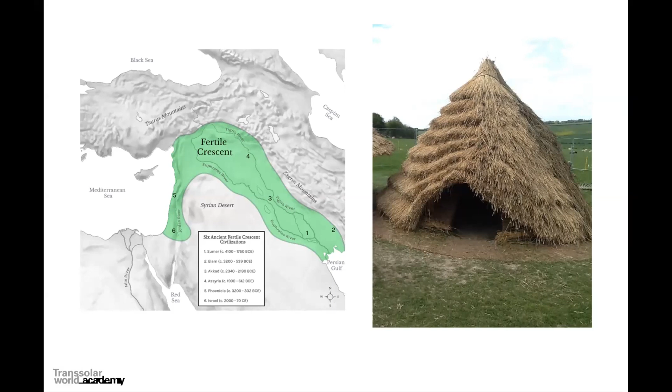Or if you live in a place where even the wind is hot and you also need protection, you can have a tent and add some extensions to create wind protection. And you also had this strategy of vertical migration.

So you have a building where you have different comfort situations depending on where you are. If you're closer to the ground and lower, if the temperatures drop, you can go to the upper part where there's more sun. So we see this feature of adaptation everywhere where humans are, and of course we see them today in cities.

Then what were actual revolutions were 3 industrial revolutions that we have seen. An industrial revolution is characterized by ways of transportation, communication, and energy that it's used. I'm gonna repeat it again: transportation, communication, and energy.

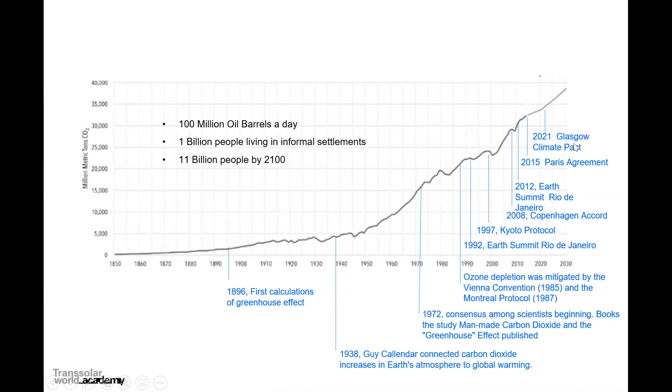And we also see interesting that people were warning since, let's say, the late 19th century that this is happening. We also see different agreements between countries taking place since the 70s and even last year. But in the end, the emissions keep increasing.

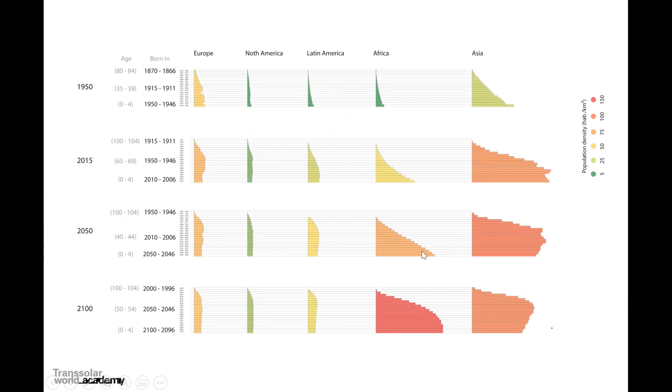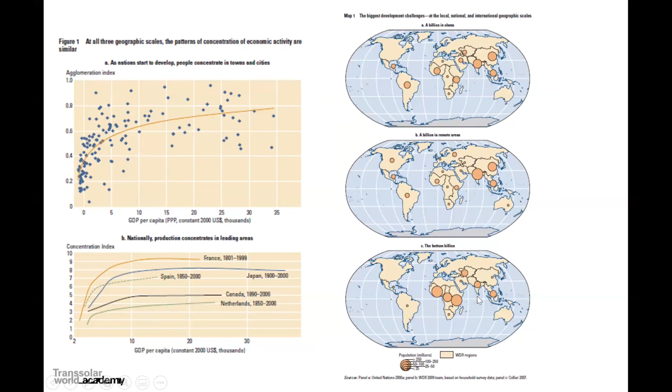Okay, so next we are going to look at the chapter of what is sustainable cities and what does it mean to have livable cities when we have such mega cities coming up. I think we've all seen those pictures where it's like a concrete jungle. Do we really want to move towards a future like this?

So we look at the multi-facets of urban planning, because it's quite a complicated topic, right? Because a city involves everything. So if we look at the sustainability aspects of urban planning...

When cities are born or when they grow, we affect environment and biodiversity. Forests can be depleted. We need resources. If we don't do this sustainably, then we cause deforestation. We can cause loss of animal habitat. We can destroy the water quality of our rivers. We've seen this happening around us everywhere.

What else can cities affect? We obviously affect the resources. Resource consumption and CO2 emissions is highly affected by how our cities are planned, and we can control how much energy consumption we have, and in turn the fossil fuel dependency, and water demand as well. In different cities, the source of water is different - some places are in the desert, some places are on islands, so some places have really trouble getting water.

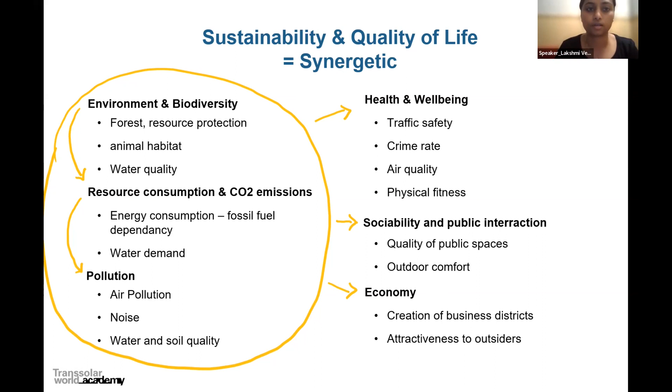We have less air pollution. This affects, obviously, if we have better air quality, that means our health is better, well-being is better. When we have less noise, when we have nice outdoor spaces, sociability increases, hence also economy grows. So it's all interconnected. And this is what we need to fight for and show that growing economy is not in isolation of sustainability - they all go hand in hand.

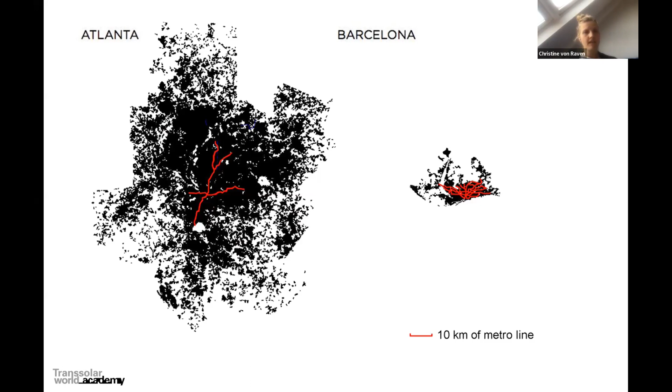This study led to some strategies or basic fabric structures of how you can define a city. Switching to the next slide, here are the common urban spatial structures based on the density where people are living. The more red the parts are, the more dense - this is a theoretical city, not a real one. In the top left, where Lakshmi is pointing, you see a really classic, typical city with a big center, like we saw in Barcelona, going lower and lower with density. Below that you see a small urban area, like a typical smaller urban area looks like.

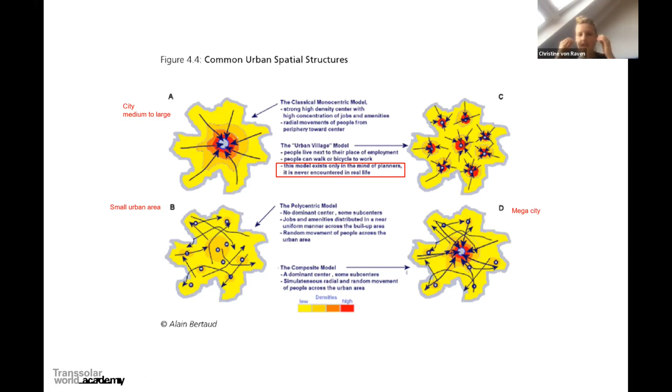So when we think about urban sustainability and livable places, we have to think about resilient urban infrastructures. We have dense cities, and they have to have a good infrastructure network to work on all different levels, in all the different aspects Lakshmi mentioned before.

So there are really a lot of dimensions of infrastructure. You can think about supply and disposal, where goods are coming from, where the waste is going, we have the mobility infrastructure, of course a really big issue. We have also digital infrastructure - how do we have the connection to Zoom right now that you can listen to us? And then we have the energy infrastructure, a really crucial point, social infrastructure, and blue and green infrastructure.

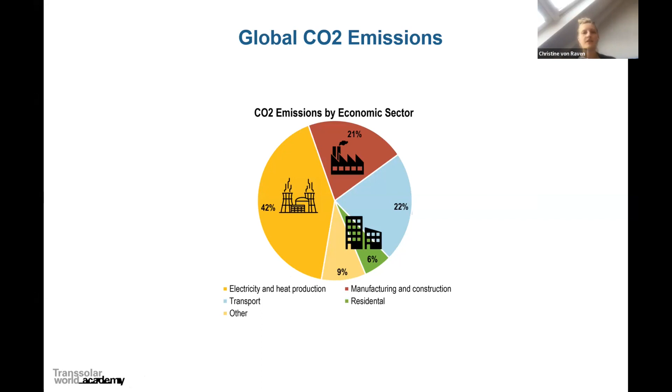You heard already a lot from our colleagues about energy and buildings, so we don't have to talk about that too much. But here again, the global emissions share, you can see by economic sector - you can see the big yellow part, which is electricity and heat production. Just energy production makes already most of the CO2 emissions. And also in the other parts, at the end of the day, most of it is energy supply. So energy is everything. Can you go next?

So to become carbon neutral, there's no other way than to make the energy shift from fossil fuels to climate-friendly energy sources. And you heard already what this can all be, from wind energy, solar power, electric vehicles - all these different energy sources we have to switch to, we have to think about them when we develop cities.

We saw it on a building scale, but really important to say is that energy is always a network. Of course it can work within one building if you have a PV panel and it works for itself. But at the end of the day, it's more efficient and makes more sense to think of it as a big network. You have PV panels outside the city, you have maybe wind power plants outside the city, you can have solar panels on one roof and maybe feed the electricity to the neighbor. Here you can see it's just more like an idea of how you can interconnect all this energy.

Cooling and warming is also most efficient when you think it together. Waste disposal and making energy out of the waste, you can also only do a bit more centralized, which doesn't have to be really big centers, but within a district you can create really, really efficient and working energy infrastructures. So you always have to consider your building within the context of the other buildings.

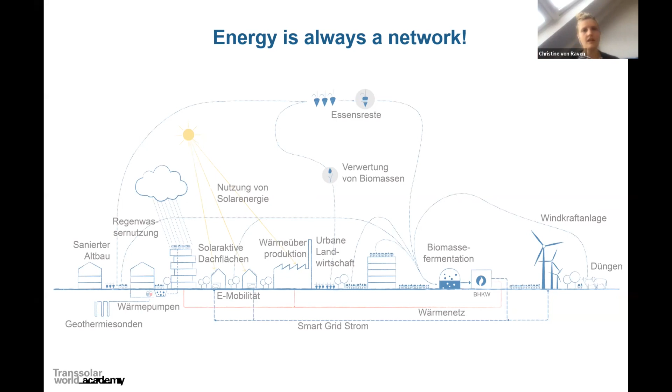Another feature is that renewable energy is usually local energy. You have a PV panel on your building and you have energy for yourself. You can maybe use energy out of the river for cooling and so on. So while fossil fuels usually come from really big power plants, which are centralized and organized by our government or so, renewable energy is usually local, run by locals. And by that, it's also an independent energy. You're not relying on the big energy grid.

Then the next point about big energy concepts is that they are always really individual. Here you see, from the International Energy Agency, the flow diagram of where energy comes from and where it goes. You can see it's really distributed - we have oil, we have coal, we have some renewables - and it's a global average.

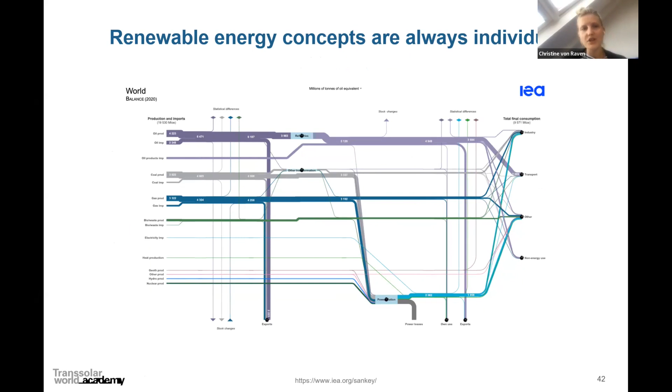So let's go to the next one, blue-green infrastructure. What is it and why do we need it?

In all cities globally, or most cities globally - in Germany we have it more and more, but of course in African cities it's already much more present - we have hotter years, it's getting really warm. In city centers, which are basically a lot of concrete, buildings, and public spaces made of streets, there are few green areas and a lot of building structures. So what we see is the urban heat island effect in city centers - it's getting really hot just because of the environment in the city. When you go out of the city, it's usually more land, agriculture, you have fewer high-rises, which stop winds that cool down the city. So in cities you have always really hot outdoor situations, and with that, uncomfortable times most of the year, inside and outside, or you have to cool by electricity, which increases electricity demand.

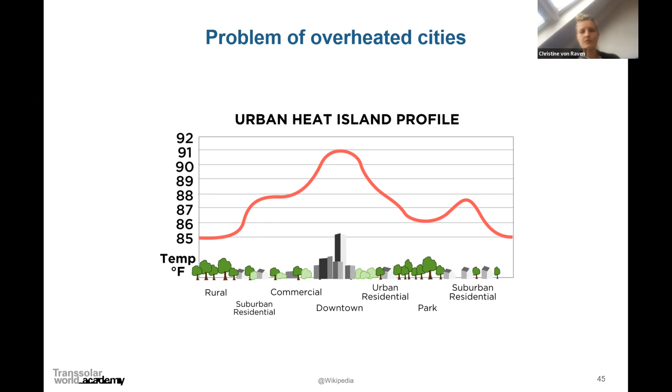The other problem in many cities in the world is flooding. Cities are usually really vulnerable - if it's really dry for a long time and then suddenly it's raining a lot, you have all this concrete in the streets and cities, the water cannot drain, so you have flooding in the cities. This is happening more and more, causing a lot of damage, which will increase in the next decades. So how do we deal with that?

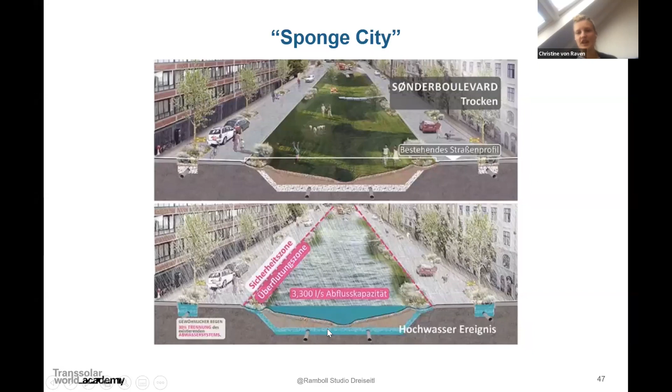The concept is called Sponge City. It's a really popular idea - that the city works as a sponge. Here you can see an example. Instead of just streets and concrete, you open up the city, you have green spaces like here, which in daytime or nice weather are also nice outdoor areas. But when the rain comes, the area can be flooded and store the water without flooding the entire city, just this area planned for it. At the same time, you can save the rainwater and use it to water the plants during dry seasons. This concept is being applied in more and more cities, and every tree can actually help improve the water and heat situation in the city.

If I can add something, it's also very common now to have a green roof and then a PV panel on top with a little bit of a gap, so you can really combine both of it. Exactly, which you cannot see here, but it's as Lakshmi is saying.

Another thing is that blue-green infrastructure really creates livable public spaces. This is a project by Transsolar in Paris, where you can see how the water creates a good microclimate, and the trees make shadows to make it really comfortable there.

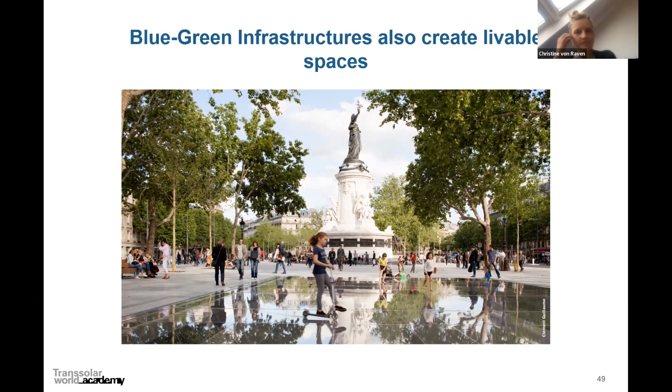This leads us to the third point: social infrastructure. It's something really qualitative, but really essential. When we talk about social infrastructure, we talk about hospitals, schools, community places, public space, and all the green around it. This is really essential when we think about a city for people.

Social infrastructure is really crucial and important, and it's not only about big infrastructure planning. It's always a question of how and where you can build it, because usually there's not a lot of money for it.

People came and brought trees into the space. We didn't do a lot of it—most of it came from everyone. So you can just rethink a parking lot as infrastructure without any building, just with people.

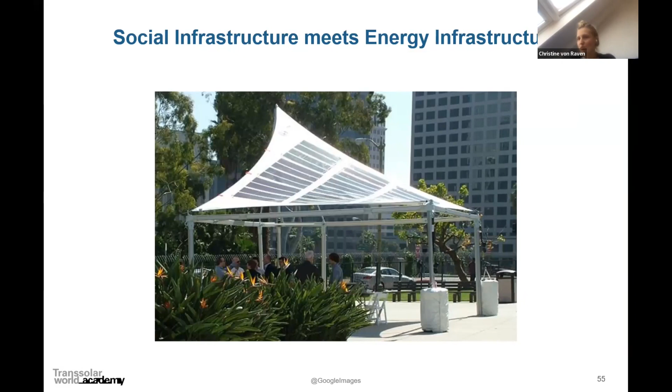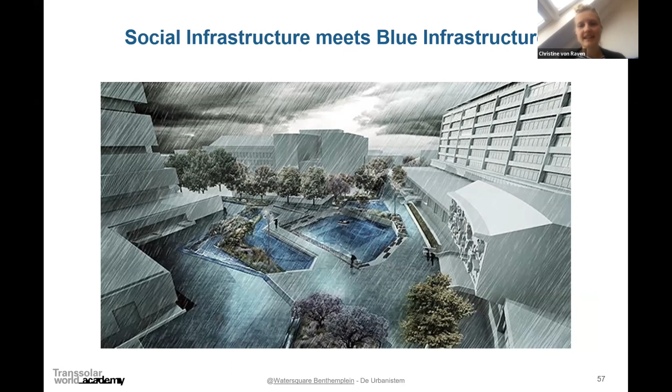But at the same time, it can be used if there's a hard rain—on the next slide you can see it fills up and works as flooding storage infrastructure. In the end, the water that's stored is used to water the plants and the city's green spaces, instead of just flooding the area.

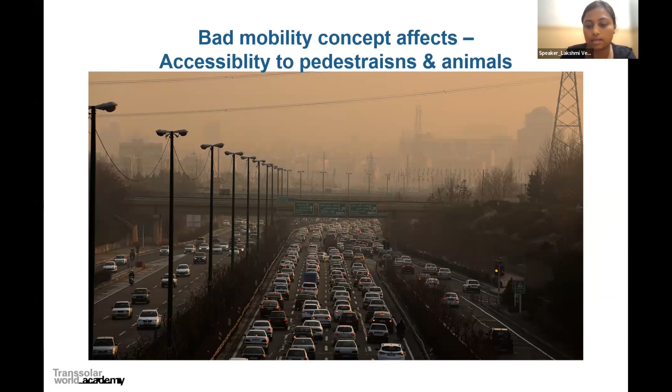And what about the other people who can't afford it, or who just need to go from here to there? It's really hard, and it's not equitable.

What else does a bad mobility concept lead to? It leads to loss of habitable spaces. Road widening means cutting down trees and breaking down buildings. It has led to destruction of really old heritage buildings even. And once it's gone, it's gone. You change the way the city looks, and it's not recognizable anymore. It just looks like a bunch of roads.

There's less space for people to live. If we are making roads all the time, then where are all these billions of people going to live?

Public spaces are then sacrificed as parking lots. This huge ground surface is all closed off. They put concrete on it, and it's just acres of parking lots. It doesn't allow water to go in, doesn't allow any plants to grow, and doesn't even allow people to use that space. It's even a safety issue, because you don't feel safe in a parking lot either.

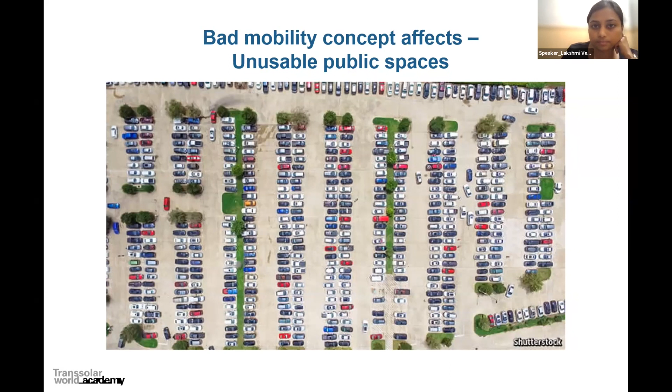It increases commerce. People want to hang out there, and if they hang out there, they buy more things. If you're in a car, you can't get off, can't stop there, can't cross from one side to another. You don't feel safe to just walk around and stay there, because it's noisy and polluted. It doesn't feel welcoming. We saw the example of Atlanta.

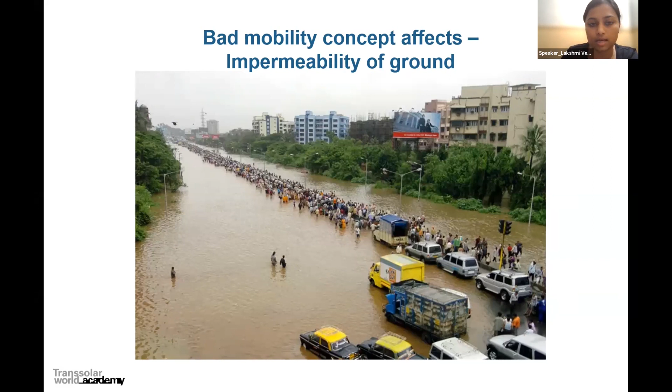And what you see here is... oops, I can't see. Diego, do you want to take over? Yes, sure, I'm here.

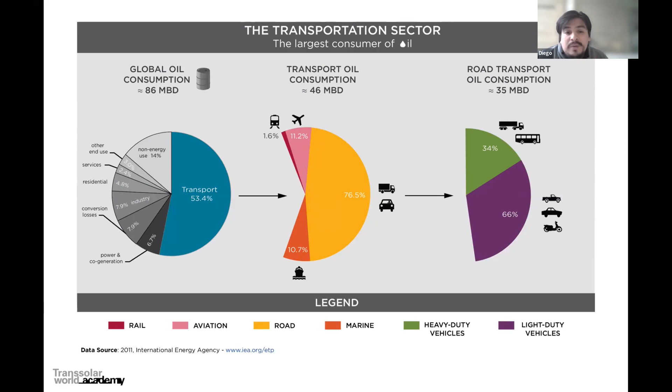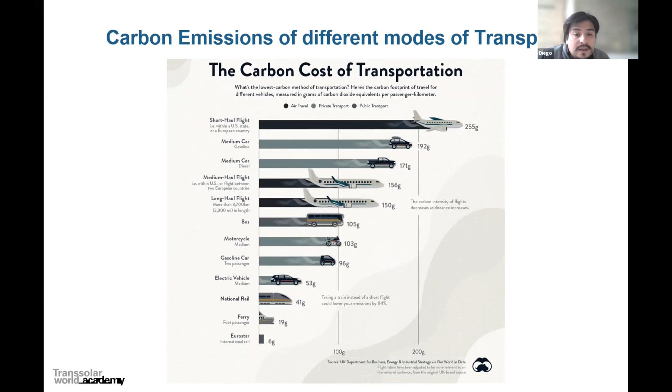Now there is a fair comparison, like in some places where the infrastructure is available: okay, should I fly or should I take the train? And here you see the answer. It's like less than 20% of what you have between a train and an airplane.

Okay, so now we would like to know a bit about you. And speaking of ways of transportation, we would like to know when you go to university, we have 4 options: do you walk, do you cycle, do you use public transportation, or do you use like a motorbike or a car? Who would like to participate? You can maybe just unmute, or write in the chat, and then we're gonna see what's the most frequent way of transportation.

Okay, we have the first one, public transportation. Oh, there's a lot of public transport. There's a pattern.

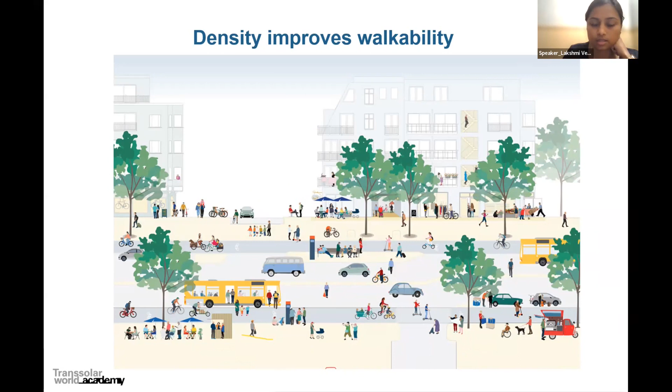So what are the factors that improve walkability? And this, when I say walkability, it also applies to using your bicycle or just accessibility to things. When we have more dense spaces, that dense, like as in more floors, you can get to places easier because you don't have to cross kilometers of residential houses in suburbia to get to one store.

When you have denser spaces, you also have mixed use developments, which means there's no office block somewhere 2 or 5 kilometers from where you are with only offices. But in the same building, you can have some floors which are residential, on the ground floor you have shops and commerce, and maybe the middle floors you have offices. So people who work in those spaces can find accommodation close to where they work or where they need to go.

So this just improves their quality of life, because they don't need to spend so much time on the road, having a car. You can just walk to wherever you need to go. It reduces distances as well. And this is what I was talking about earlier.

It's about designing your street canyons as a section, right? So when you design your street well, you have here, for example, public transport in the middle - it could be trams, it could be buses. You have cars, and then you have also space for bikes, for bicycles, and you have space for people.

And you also have space for people to stay there, and maybe cafes have space to put their tables or something like this. And in many cases, if you go back, it would be redesigning the streets, because in most cities, the streets are older than cars.

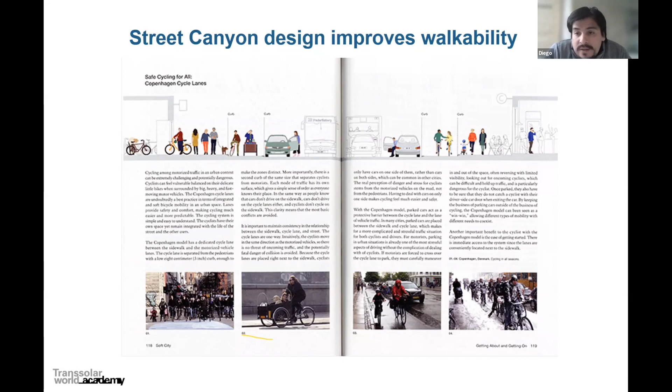And people will want to walk, or they can walk, only if they feel safe, right? So separating first of all, giving them a space to walk, having proper footpaths wide enough, straight enough that it's not always under construction, and separated from the traffic so that they feel safe to walk, and have a little bit better quality of air, and having lights so that they feel safe enough to walk, having it more open, and not having huge walls next to it where you feel basically unsafe to walk.

And coming then to the next topic of outdoor comfort, this obviously also improves not just walkability, but also how spaces are used socially. If it's comfortable, only then will you go outside and stay there. If not, you will be running inside.

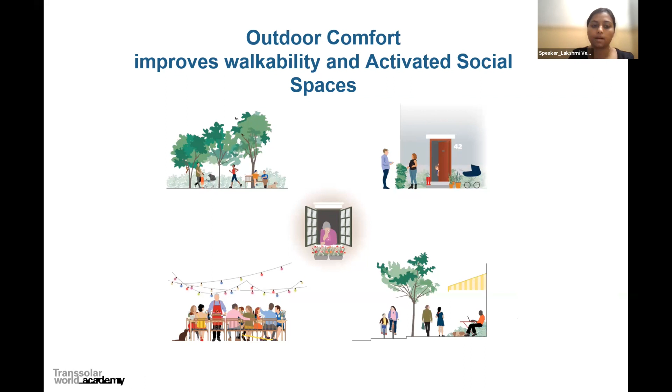And how can we make spaces more comfortable? You can have plants, you can have furniture, you can have enough space where people can stay, right? But also you can design your cities, the street canyon, and the building blocks in a more climate responsive way. You have heard of a lot of these concepts before, and this will maybe be a little bit of a recap, but also maybe some new topics are introduced here.

So what is outdoor comfort? It is similar to indoor comfort, except the influencing factors are similar. So you have influence from whether you're in direct sun, obviously you will feel hot or warm. If you're in a cold climate, then you will feel nice if you're in the sun. So it really depends on the context.

So solar radiation, direct solar radiation, but also diffuse solar radiation. And not just this, but you also feel heat from the surfaces that are around you. So I'm sure you've noticed on these dark asphalt roads, you feel it's really burning, like it's hot, you can't even step on it. So colors of the surfaces also matter. Wind makes you feel much nicer when it's hot, but it also makes it very cold if it's a cold climate.

And air temperature and humidity are very obvious influences of outdoor comfort. But apart from this, what you have personal control over is what kind of clothing you wear. This is the clo factor that you might remember from your first lecture. So dressing appropriately for your climate is the first thing that you can do. And I think in Germany, we have a saying: there's no bad weather, there's only bad clothing, right?

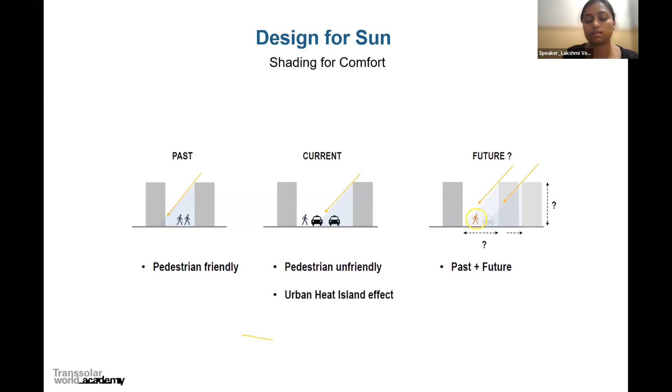And then comes the orientation of the buildings or the orientation of the streets. There are many options. I think traditionally it just happens organically, but when you're designing a master plan, you can have a lot of influence on this. Instead of just doing it aesthetically, it makes so much more sense to look at it functionally and provide enough comfort.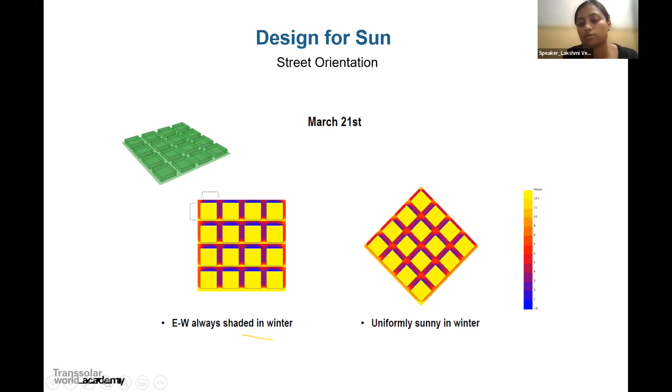Building forms can also influence a lot of things, like daylight access and visual access. If you have sharp corners, it's also a hindrance for people using the street. If you have filleted corners instead, you have more space for the sun to also reach this block.

And then we design for the wind. In summer, you want wind flow, and in winter, you want to restrict wind. It's difficult to do this everywhere, but it's possible through individual local interventions. This is also something you've seen before - how wind moves with different street canyon shapes. If you have a larger gap, you do have more air movement, and if you have smaller ones, the air just goes on top.

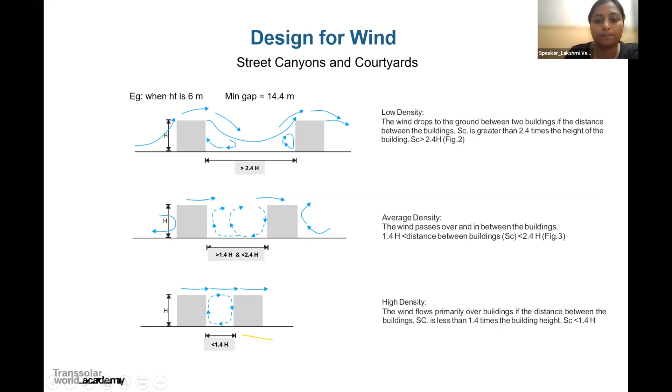Different building forms can also be designed according to the wind. In this case, you have cold night winds coming from the north, and daytime winds coming from the south. So we want to allow day winds but block the night winds. This isn't the case in all cities, which is why you have to look at the climate in order to react to it. In this case, we are able to block the night winds.

But in this case, you're not able to block it, and you also just allow the daytime winds.

Another example is when you have cold winds below 12 degrees coming from the west and north, which you want to block, and you have nice cool winds coming from the southeast. So when you have such an arrangement, you're not blocking any of the cold winds, but you end up blocking the winds that you want. In this case, it's designed to allow the winds that you want and block the winds that you don't want. So these are all the 3D aspects you can think about when sitting down to draw your 2D plan.

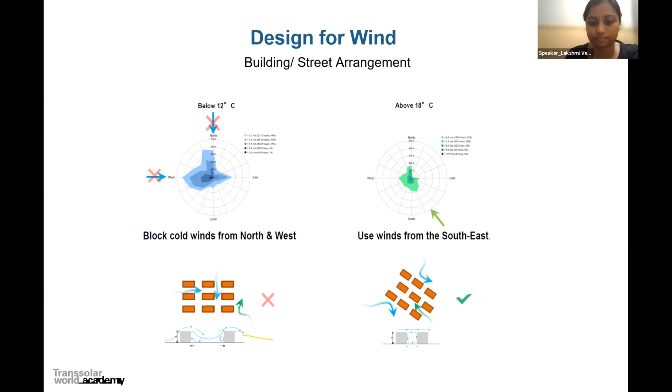Okay, can you guess which city this is? Maybe we can just have some answers in the chat. Can anybody just take a random guess? Anyone? What about now? Does this give you a little bit more? It should be any city in the Netherlands, either Amsterdam or... Yeah, nice, yes that's the right one. That's great, yes exactly, you are right.

It's Amsterdam, called the biking capital of the world. But it's also known for canals, right? How did this city end up being like this? It has these thin streets and a lot of canals, and this was shaped basically by the port and by the boats. So the streets weren't really designed by the city, it just happened organically because boats needed to go and deliver and unload and load. And that's how the streets ended up happening.

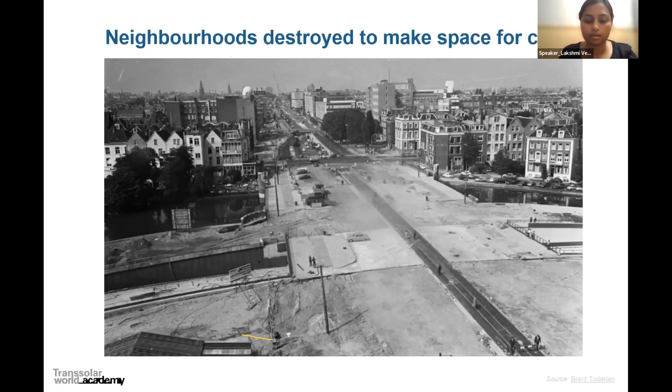But what you see now—this was in the 70s, so polluted, barely any people outside—and this is now where bikes are given more importance. You see so many more people, people sitting on the streets, so much activity, it's so lively, the street is just more alive.

But how did this happen? It didn't just happen actually. People think it was great city policy, but it actually wasn't—it was because of the people, because of the public. What happened was in 1971, there were so many deaths—3,300 deaths just in that one year, and 450 of them were children. People were so angry, they didn't want to stand for this anymore, so they went to the streets, had protests, and had this campaign called Stop de Kindermoord, which means stop the child murder. And they had bicycle demonstrations.

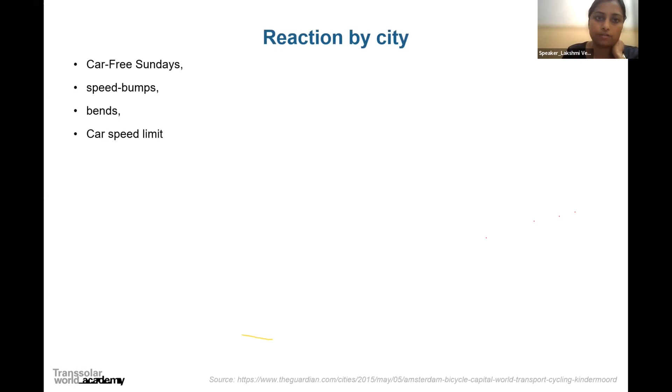They occupied all these accident spots, stopped traffic, put tables on the street, and even the police were helpful, closing the streets on special days so children could play—similar to how Christina showed in Stadtlucken, where parking lots were converted temporarily to show the potential there. Finally the city listened and started some small changes, like car-free Sunday, speed bumps, bends, and car speed limits, but these were not enough. The most critical steps that led to the success we see today were some of the things I'll describe.

It's about prioritizing rider safety. Just a line on the street is really not enough, because cars will not take it seriously. Completely separated bike lanes with physical barriers were found to decrease fatalities by 44%, and also saw an increase in the number of cyclists.

Another key thing people need to look at when designing bike networks is not to just have bike lanes starting from nowhere to nowhere. You have one street with a nice bike lane, but then what happens after that? The cyclists get lost and can't really get to where they need to go. So the bike network needs to be interconnected. Here you can see all the red lines, which are the bike network, and it's so extensive—there's almost no street where you can't go anywhere in the city without space to cycle. They have over 700 kilometers.

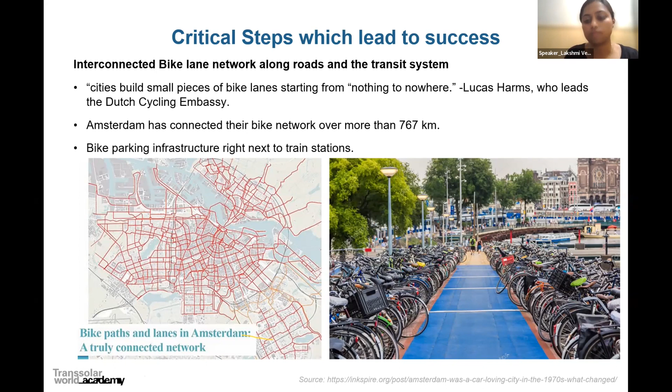You also need bike infrastructure, like parking, making sure it's convenient for people to bicycle. They also put restrictions on cars—a maximum speed limit of 32 kilometers per hour, slow enough that they are able to react to pedestrians and cyclists, who are given first priority. So cars must yield to cyclists. This is what brought more and more people to switch to bicycles, because now driving a car was just a hassle—they'd have to go slow, they'd probably reach faster with the bicycle anyway, and there are so many road bumps and everything.

These solutions can't be directly copied into your city, because every city has its own special requirements. What made it successful in Amsterdam was that the city was already dense, so people didn't need to go so far. If you put these solutions in Atlanta, they would never work because of the long distances there.

In a dense city, if you need to bike for 10 minutes, it's a no-brainer. You will take the bicycle. You don't want to take the car.

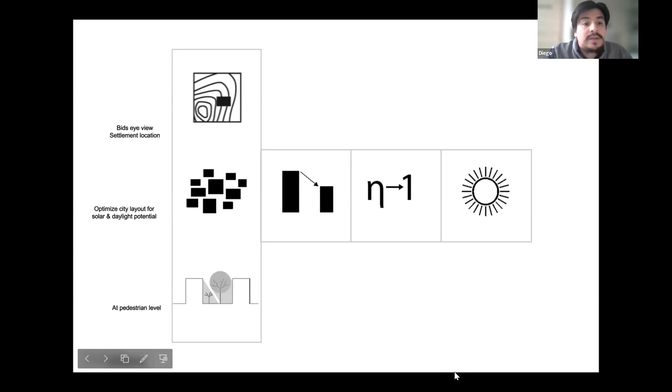If we focus on the icons in the horizontal line, you see we try to have 4 steps to accomplish a sustainable building or neighborhood. First, the optimization of the layout - we've covered this already, where the distance between buildings has a lot to do with how the sun is going to shine, and how air movement and wind are going to be.

The second part tells you how the facade of a building is working - is it going to be very tight, is it going to lose or gain a lot of energy?

The third point, this eta equals 1, represents the efficiency of a system - the efficiency of how we produce electricity, cooling, or heating. And the final part: once you've got these 3 aspects right, you've reduced the energy consumption enough that you can cover it with renewable energies, for instance solar energy.

In the case of a city, we can also look at it from a bird's eye view, or even from space - using satellites to see where the location of a city is, where vegetation is, which parts are permeable to water or not. From this, you can pick a location, or if it already exists, get a good idea of how winds approach the city, or where water is, and then move to the second step where you optimize the city layout.

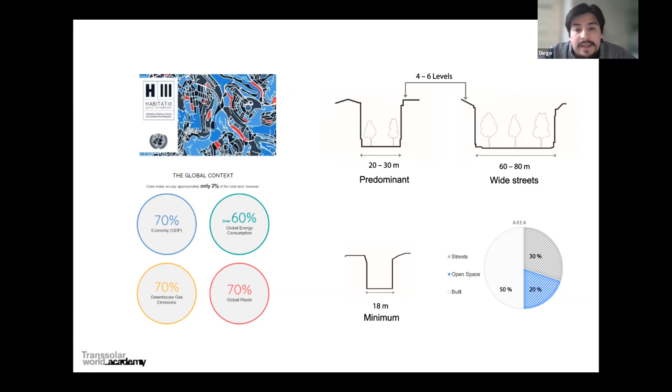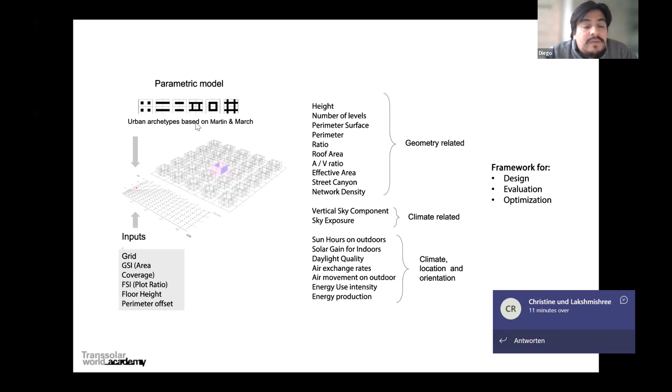Now all these inputs can be part of a parametric model, and this is also the question you ask about 3D modeling. You can put this information here, and just looking at the coverage area or the floor area ratio, you can put this information into the model and pick an archetype of a building. Let's say you can have a point house — those are top views of a house — and out of that you get all these outputs that are always the information you see in a building.

So let's say if we have houses in a courtyard, it would be more or less in the chart where I show you the red spot. And of course, we can animate this, and you see that all the possibilities you can think of can be plotted in this diagram.

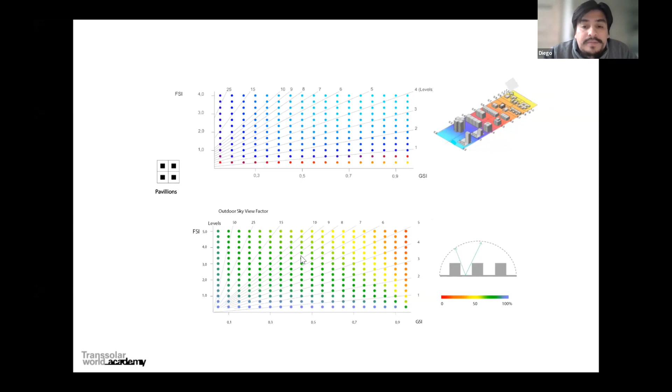So out of that, you can add a second dimension, which can be the area to volume ratio. Let's say how much facade you need to cover a building, or the exposure to the sky of the streets, and even the proportions of the street canyon. So if we have a street canyon of 2, this means that 2 times the elevation of the facade is the width of the street. In this plot, you can see it's in this corner, or it can be very wide.

So this is an application of 3D modeling, and in some cases some of the properties of these geometric models are fixed, but some of them also depend on the orientation and on the location you are in.

The importance of location is that during the lifetime of a building, you always have the same site, and in almost all cases the same structure. But during the 60 to 80 years of a building, you have to remodel the facade at least once, change the interior setting at least 3 times, and the systems — lighting, plumbing, and so on — more times. And of course stuff like furniture changes many, many times.

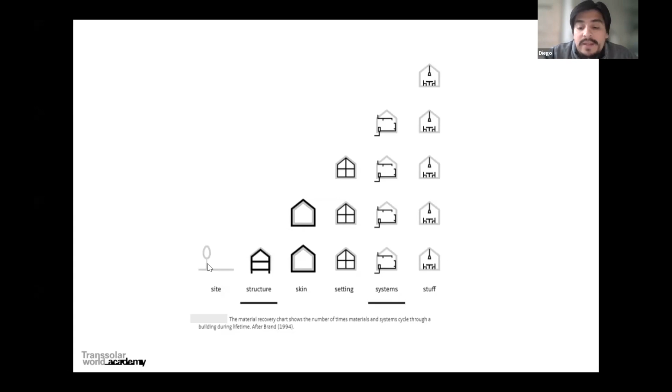So for city planning, if you get these first steps correct, that is the best way to avoid problems in the future.

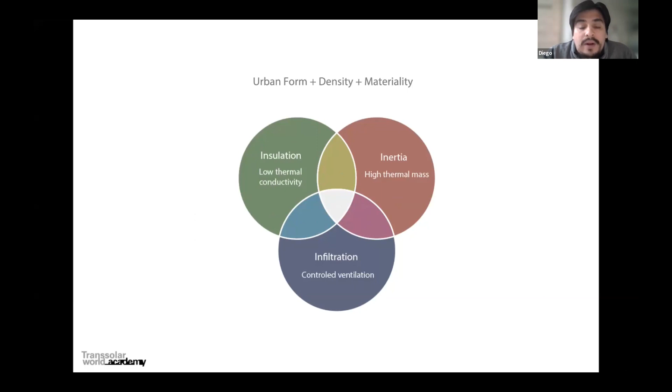Speaking of the building skin, I would say that's the last part of urban design, where they can tell you okay, the skin in this location should be like this. The skin can have these 3 different properties, and of course there can be intersection between them. For instance, once you know how much heat is going to hit a facade, you can say okay, in this case the outer cladding has to be light color, or has to be concrete to have thermal mass.

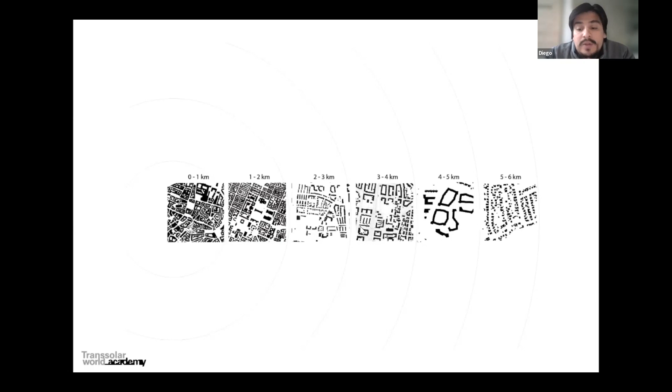I think it failed because they ignored the concept that cities always have a gradient. People have an agglomeration in the city center, and as you go outside, you have smaller buildings or more free space. This is information taken from satellites that were photographing the city of Munich. Here you have information on the population in the city center — roughly 4.1% of the population lives there. As you go outside, this number increases, and then in the outer part it decreases. All this happens within a radius of 5 to 6 kilometers.

We see other examples where you can have urban sprawl for more than 20 kilometers. So the question is, how big can cities be? Those are decisions that the populations have to take.

I have here one example of the city of Barcelona in the Middle Ages, with very, very narrow streets where there were a lot of problems with pollution and even health issues in the population. So at the beginning of the Second Industrial Revolution, they decided to expand the city and make a city where everybody can have access to light and air.

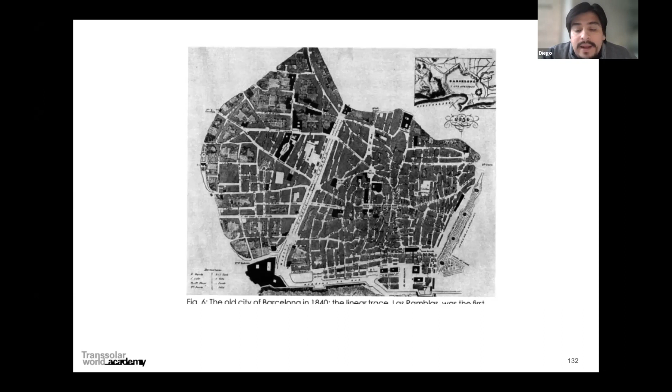And this is the first idea they came up with. It was actually an engineer that did this plan with an orthogonal grid that would allow, let's say, place for cars, for walking, and also buildings will be ventilated and well illuminated.

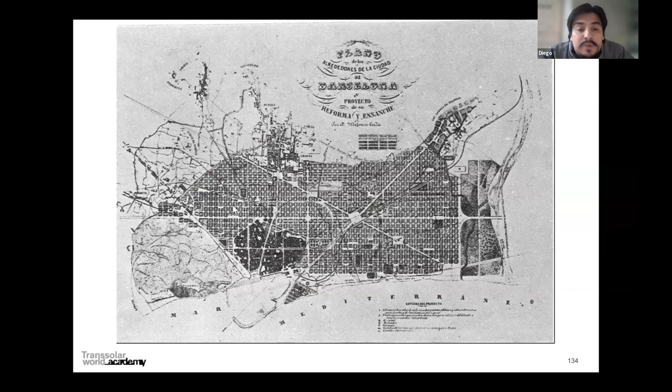Here you see that this would be a great expansion of the city. Here you see the Mediterranean Sea, and this would be an expansion of more or less 5 times what they have at the time. The first idea from 1859 was to have either blocks next to each other, or creating a lot of free space.

But here, as you can see, the floor to area ratio increased from 1.5 to 4.6, which is what they currently have, and this is due to the success of the city. The city became very, very successful, and it attracted more and more people.

So they had to react and make more buildings where they thought they wouldn't need one in the beginning, and also add some floors.

Here you see an example of how an existing city with a system, let's say like a grid, can be densified. What you see here on the right is that once you have this grid, some blocks can be used for other purposes, like a church, like a small stadium, or like a prison. You can also have schools, a little bit of industry, and factories, of course. Here's a picture of Barcelona, and here you see this many times densified city.

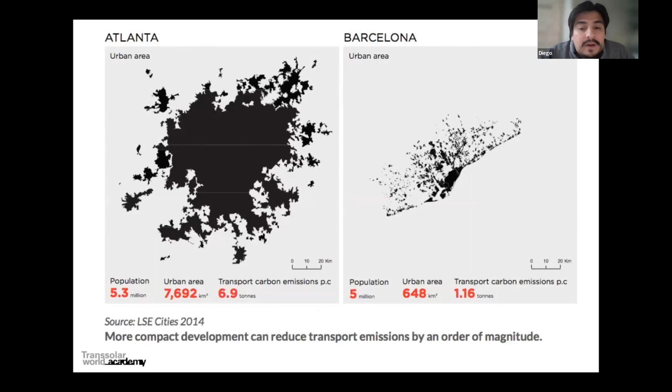Here you see this slide, we've shown it before, but you see the emissions in one case for roughly the same number of people, 6.9 tons of carbon emissions, and in the other case 1.16.

So now that we have looked at the concept of the urban gradient, we can use this chart to plot not one solution. Remember the example of the Chinese government, but many, let's call them areas of solution, where you can know that a certain urban form has a good performance.

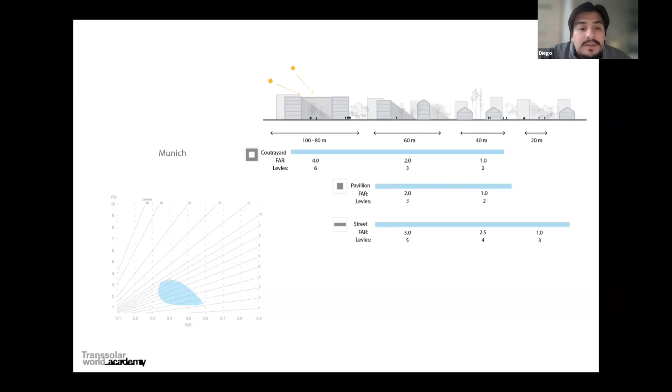For instance, in this chart, I plotted what would be an efficient urbanization in Abu Dhabi, in Munich. I feel like fewer levels would lead to more solar gains, Mexico City, and so on.

Now, if we think about the steps of urbanization, according to many urban planners, you can have these 3 steps: 1, build the infrastructure; 2, make a division of parcellations of the different sites; and 3, erect the buildings. So what a developer would do is invest and do everything at the same time.

What we see in most informal settlements is that first people start to build, and once this urbanization is successful, it starts to grow, and then they say, okay, we need a little bit of organization, and then they divide what they already have. As a third step, they create the infrastructure. So water infrastructure, electricity infrastructure comes at the end.

We would like to make the case for a sustainable design where you can do both, considering the 3 aspects: a climate responsive layout, like I explained before. And once you have a city like this, remember the lesson of Barcelona, if the city is successful, it's very likely that it's going to attract more people. And if that's the case, there are 2 options: to sprawl or to re-densify.

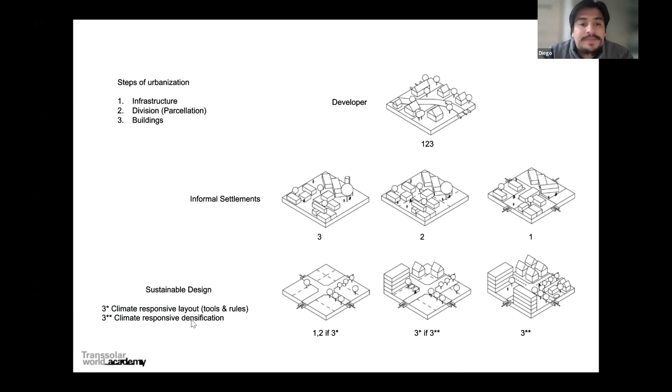Christina, before the break, do I have time to show the example of Abuja? The break doesn't count, just ignore it and go on. Okay, switched it. Fine, so you still see my screen, correct?

Now I would like to show you an example of where we tried to talk to a developer and talk him into not doing this, but trying to follow this approach. This is a project I worked on in Nigeria some time ago. Do you see the presentation of Nigeria now, or do you still see the other? We still see the other. Okay, then I have to switch.

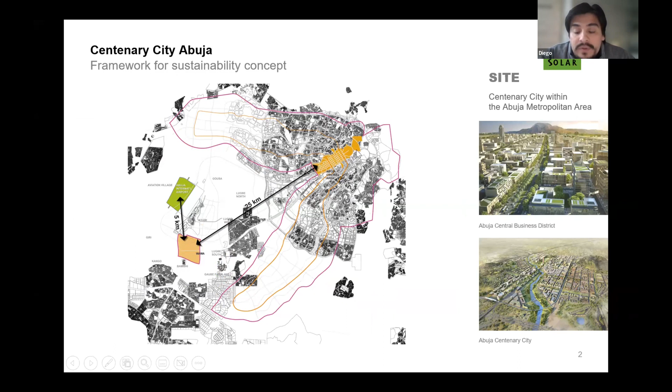Now this is the framework for the sustainability concept of Abuja. It's supposed to be the expansion of the capital city of Nigeria, a new district far from the very dense urban areas they have right now, and next to the airport. They wanted a fresh start, because most of the ideas they had here didn't work out. We were approached to have a vision for a self-sustaining, energy-efficient city in West Africa.

So this strategy I presented before, we try to follow these 4 steps. First, you optimize the city layout for solar gains and daylight potential. Then you minimize the energy demand, mostly with the building skin, like how big are the windows, what are they made out of, and also the opaque components. Then maximize the efficiency of production, cooling is very important here because they have a hot and dry season. More on that is coming up. And then once you've done that, you can maximize the use of renewable energies.

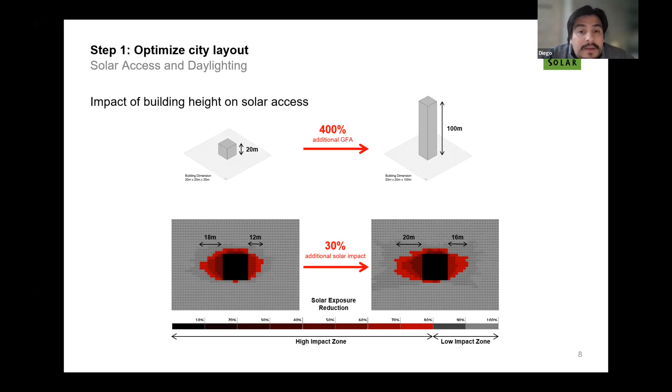So let's start with step 1. We analyze different parts of the city here, once again using different tools and 3D modeling. We came to the conclusion that due to the closeness to the equator of this location, the impact of a tall building on shading on the neighbors is not that big. A block with 20 meters has a cast shadow or area of influence from 18 meters, and if you go all the way to 100, this expands to roughly 20 meters. So this is a good case to be a little bit more dense without taking daylight from your neighbors, and of course increasing the gross floor area.

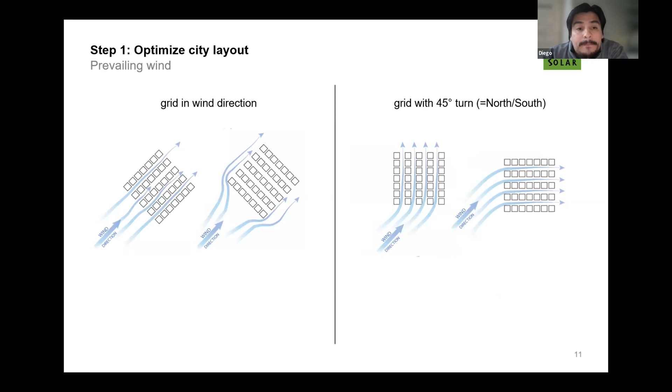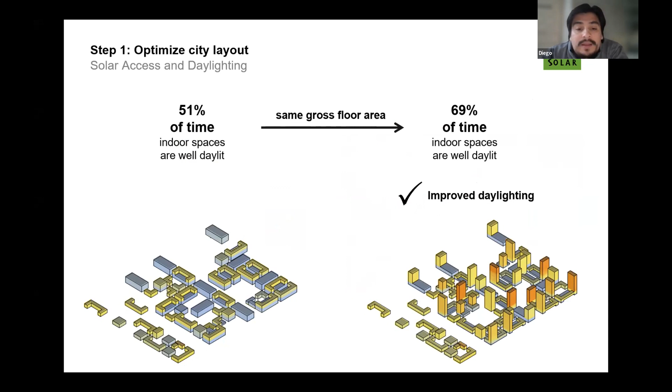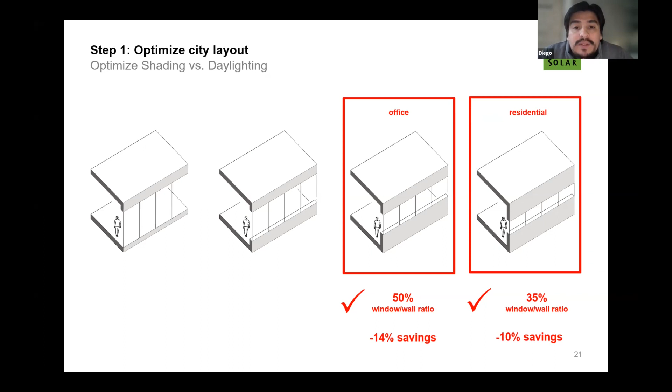So these are the steps we did, first to have comfort in the interior, and then minimize the energy demand. This is mostly about the building skin, like what is the facade made out of, the window and also the opaque parts.

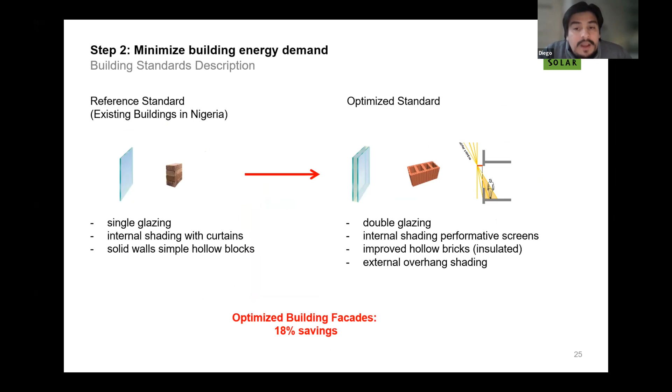We analyzed what you see in Nigeria nowadays, and say okay, maybe you can spend a little bit more money on the facade, but this would give you savings for the future. In this case, it's 18%.

Also the systems for illumination and computers and so on, we also took a look into that, and the air conditioning units, where you can have what you see in many places, every room of a building with a single air conditioning unit, or you can have a central system used for the entire building. And of course, you can use surface cooling, either for the ceiling or from the floor.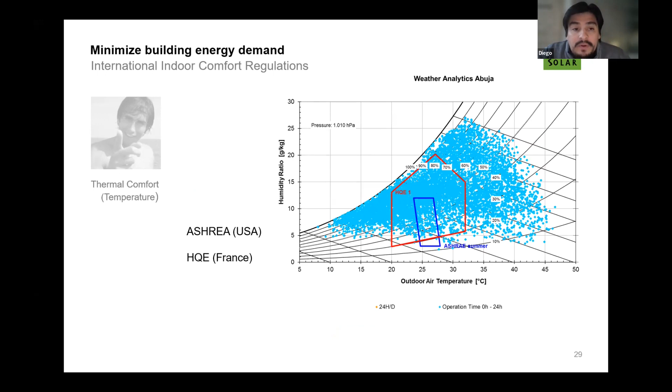So we also took a look at the local regulations, and here you see, I guess you are familiar with this chart by now, where we'd like to go for the comfort in this area, and some limits of what are we going to allow or not, and if the systems that we're proposing are going to create the desired effect or not.

So in the end, we make a simulation of the baseline. Here you see the demand for electricity for cooling during the whole year, every hour of the year. Then we made this run with the approach that the local planners would have, and then we compared to what we proposed.

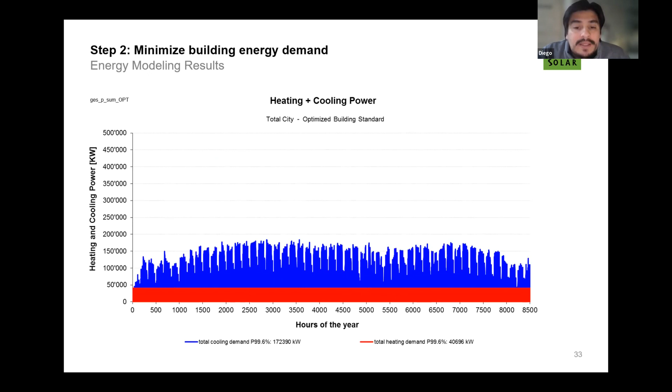And here you see that it goes down. So if you downsize all these peak demands, you can also downsize the mechanical rooms and the mechanical systems that would deliver electricity and cooling. Here we see the reduction in cooling demand, which was 56%. Electricity demand went down to 38%, and the same for the peak loads for electricity and cooling.

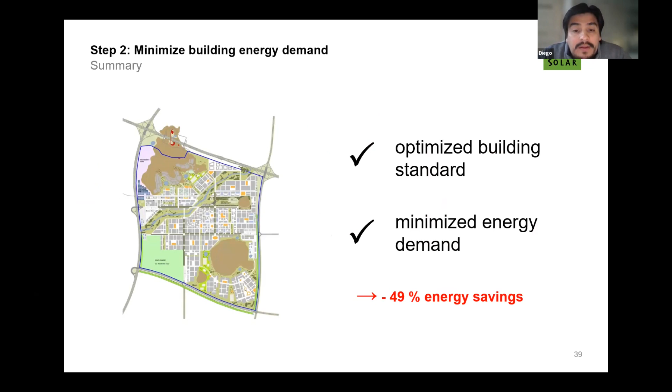So here we are already by savings of 49%. Okay, now the energy production on site, we said okay, you can have this system that I described, just in every room you have a split unit, and this has an electrical efficiency of 2.5. Let's say for every unit of electricity that you put here, you get 2.5 units of cooling.

Now this system can be more efficient if you do it centralized and you put these units on the roof. Then the efficiency increases to 3.5. And then you can have a district system where you do a very efficient cooling somewhere in this place, and then just using pipes, using the infrastructure, you pump the cold water to the buildings. This increases the efficiency to 8.5.

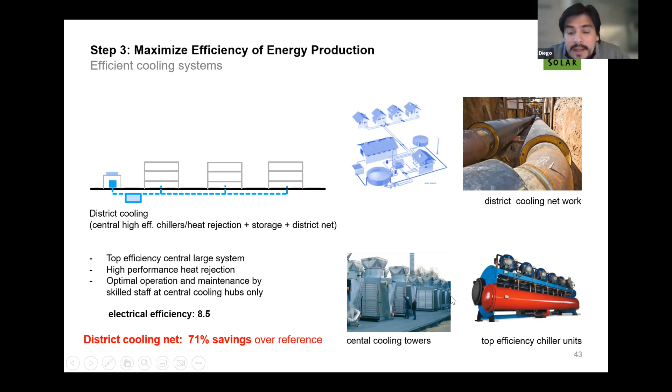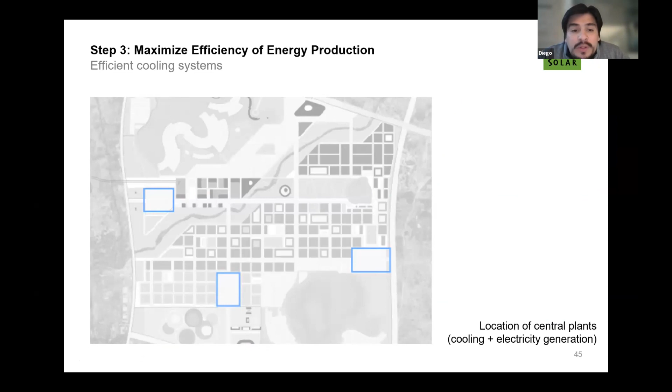So here we have a plan where we localized where would you need this system to be, and then we just made a sketch of how would this infrastructure look like. And this infrastructure should also be able to produce electricity. In the first place, this is a combined heat and power production, so it's actually burning fuel, and where that fuel should come from comes in the next slides.

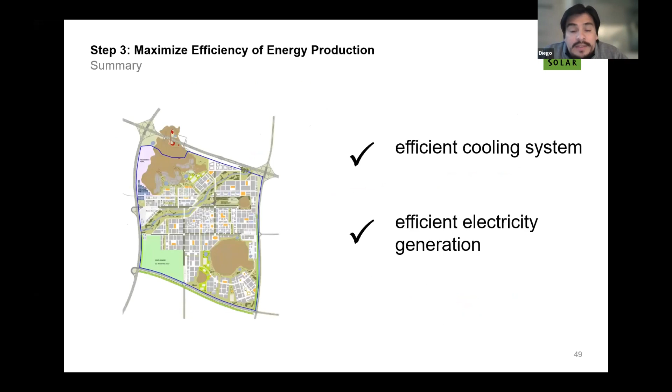But here you see that from, let's say, a diesel generator, what's the first idea? You can reduce the emissions to 45%. And now that you have done these previous three steps, you can maximize renewable energy production.

And we also compared with another location like London, to say okay, if people invest in PV, even in London, in this case in Abuja, you could get almost double the electric output.

There are some rules you have to follow to make this system efficient. We also took a look at the waste that the city is going to produce, and thought, out of that, you can make an incineration plant where you can also turn this into energy. In all these cases, it's never the case that with all the waste of a city, you can produce 100% of the energy. If you accomplish 5 to 7%, it's a very good number.

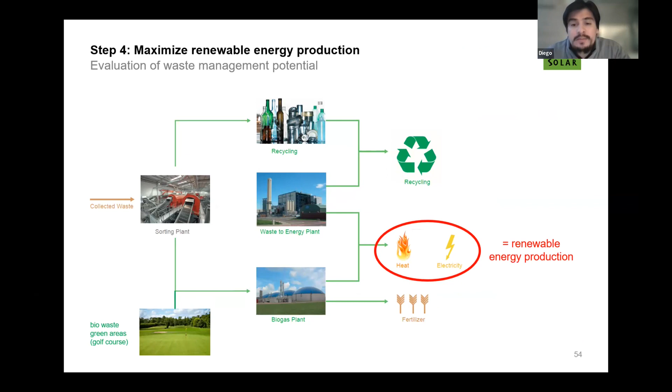This is more or less what we had here. But you can also have other systems like biogas to produce fuel, and that can also be used for electricity production. So following these steps in this journey, you see a reduction in power demand and also in CO2 emissions, and it drops at every step, and in the end, you have a reduction of 96%.

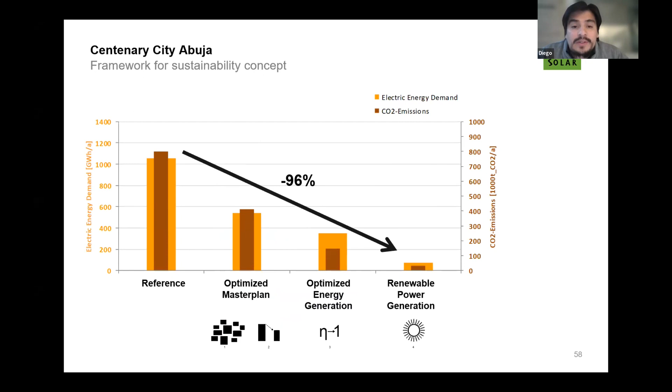I think this is the last slide for this example. So if you have questions, I think it's a good time now.

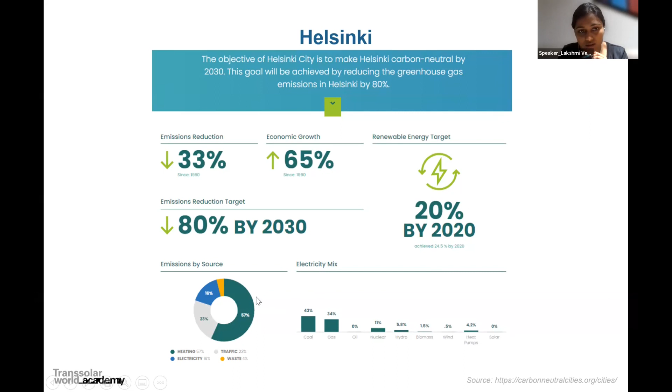This is something we should keep in mind and also educate other people about. Their energy mix still has 43% coal and 34% gas, which are non-renewable resources, and they had a target of having 20% renewable energy by 2020, which was already last year. They achieved 24%, so they're also doing well.

Looking at all this, I think it makes you, at least it makes me, hopeful that other cities will follow suit and take this more seriously to make carbon neutral cities, and really work on the electricity grid and all the heating and cooling strategies to really control what is happening. Diego, do you want to conclude?

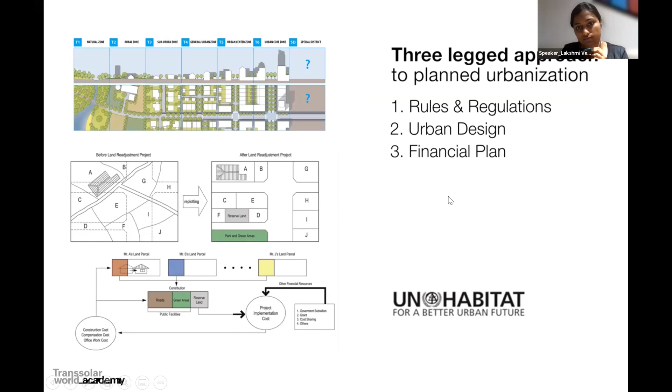To conclude, there are some hints from the United Nations Habitat where they say we need a three-legged approach. So you have good rules and regulations, which is about who is able to build what where. Those have to be clear.

We try to focus a lot on urban design, and that was the main topic of this presentation. But in the end, there are other aspects, like the financial plan—where are the resources going to come from? And what you see here is an example of a project of readjustment.

This is readjustment of plots, where they convince people to give some space away to create space for roads. Just at the moment you do that, you increase the value of your site. And of course, you're also leaving space for illumination and for airflow. So this is one idea of how even in existing contexts, this can take place.

Another very interesting example of a financial plan is how Hong Kong works. They realized that, imagine in this example, if between plot B and G someone made a bus station, this bus station is going to attract people. And when they attract people, there will be small businesses next to it—someone selling groceries, or food, or even clothing.